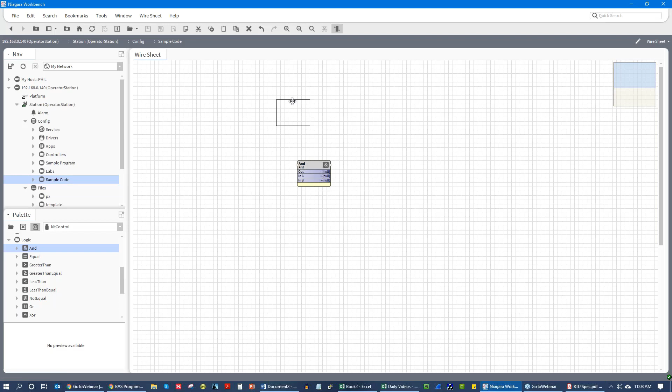All right, where I'm going to spend a good portion of our time though is under the blocks category. So when we think about blocks, with most manufacturers, you will have a set of common blocks that will stretch across everyone's software. And then you will have blocks specific to that manufacturer's software. So for example, let's talk about a common block, an AND block. An AND block is a simple Boolean input, Boolean output block.

So when we talk about programming, we're talking about three real data types that we're going to be dealing with: Booleans, integers or numerics, depending on what you want to call them. And those are basically floating points, analog points. Analog, meaning that it varies. Whereas Boolean is a true, false, 1, 0 state, analog is a variable state, so it's typically a number. And then enumerations, which are also known as multi-state values, also known as arrays, just depends on your programming software.

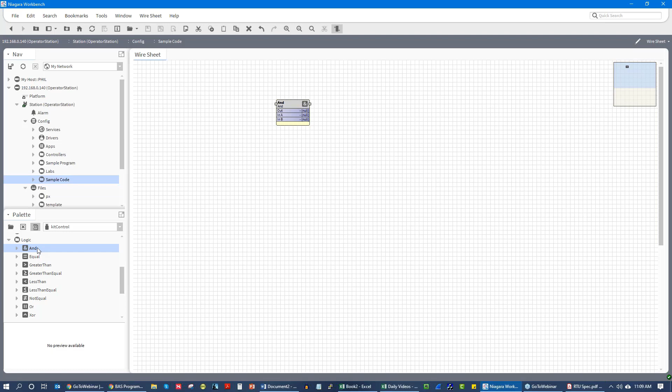And so when we look at blocks that are common, that you abso-freaking-lutely need to know, we look at our Boolean blocks. Our Boolean blocks are almost always going to be AND, OR, XOR, NOTs, things like that. These are blocks that we absolutely need to understand. Now, we don't have time in this webinar to go through truth tables.

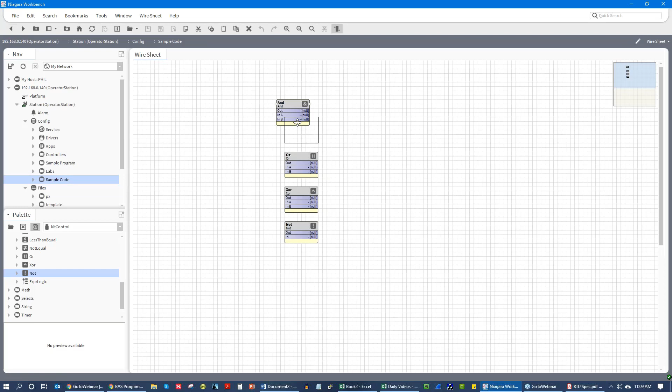Actually, let me click here. My mouse is being a little wonky and that is double clicking for some reason.

But we don't have time to go through truth tables. But a truth table basically is, if you have a certain condition of inputs, you will get a certain condition of outputs. So if you're taking notes, which I highly encourage you to do during this webinar, granted, you will get a recording, but I encourage you to take notes regardless.

What we're focusing on here, and you know what I did not do at the beginning? I did not go and check that you all can see my screen, but you guys are not saying that, hey, we can't see your screen. So I'm pretty sure you can see my screen.

All right. So as I said, Boolean blocks, we really want to know right off the bat. And as I mentioned, I'm not going to have time to go through truth tables, but we've got a blog article about BAS programming. I'll send it all to you after this webinar.

All right, so from there, we go into things like comparative logic, greater than, less than. Boolean is probably the most important logic blocks because you use them on almost every program, immediately followed by comparative blocks. So comparative blocks we're going to use substantially in a lot of our design patterns, some of the design patterns we'll talk through today. And so it's really important that we understand greater than, less than or equal to, not equal to, et cetera. And this double clicking is really obnoxious. All right. So with that being said, those are our basic logic blocks.

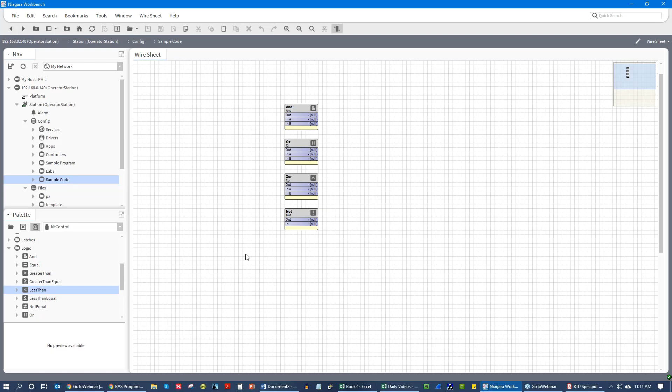Now, as we get into some of the more manufacturer-specific logic blocks, in our case with Niagara, we're looking at a library called kitControl. And we start to see they have things like lead lag cycles, which is basically for cycling chillers and air handler compressors, things like that, whatever you're trying to do on lead lag. Or dual fans, fan walls, etc.

Loop point is basically a PID loop, and T-stat is a poor man's PID loop that is basically supposed to emulate a temperature control driven PID loop, but I don't personally like it. I prefer loop point. So that is some of the manufacturer specific stuff. So you can start to see how when you get away from Boolean, you get away from comparative logic, and you move into loop logic, sequencing logic, you move into things like latches, you move into things like selects.

That is where you start to get more manufacturer specific. Now, this is where a lot of folks get screwed up. They are like, oh my gosh, I don't have the switch block, I have the select block or the latch block, or etc. Instead of having a flip-flop, I have a latch. And that hoses them and they get frozen, and it's not necessary.

So whenever you're dealing with this, and some manufacturers are better than others, I recommend that you, first off, if you're like, I can't figure out what logic block to use, I'm on a job site, I totally get what an AND block is, but I can't figure out these latches, I can't figure out these selects, et cetera, what do I do? That's where I highly recommend you utilize the manufacturer's information.

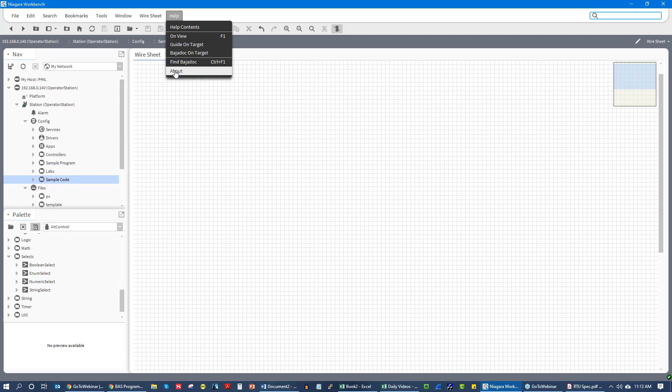Now, like I said, some manufacturers are better than others. So here I'll just show you. Let's say we don't understand what we're supposed to do with the Boolean select. So we would just type Boolean select in search, wait for the search to come up, and then we'll see, okay, Boolean select is found in the select folders. See selects for overview, and then we can start going through select. It allows one of multiple inputs to be selected and passed through to the output.

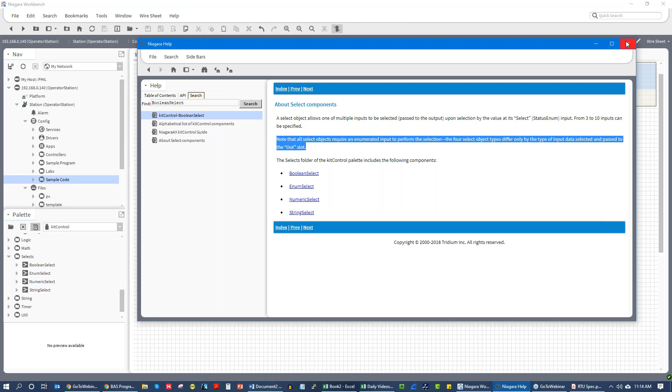So as we start to read select, we start to realize this is actually more like a mux block than anything else, especially with enum selects. So we start to figure out, oh, okay, this is what this block is able to do, and then we're able to fit it into design patterns, which I'll talk about in just a second. But before I go there, I want to talk about real-time versus compiled programming.

So Wiresheet is real-time programming. And this is what's neat about them pushing Niagara to edge controllers. You're also seeing other manufacturers start to push their frameworks using a single programming tool to their edge controllers. Edge controllers is really a marketing way of saying controllers that are in the field: air handler controllers, VAV controllers, fan coil controllers, etc. And most of us, when we talk about controllers, are actually dealing with free programmables. Very few of us are dealing with ASCs, application-specific controllers, anymore.

So when we're talking about a real-time programming environment, I don't have an actual edge controller mapped in. If I did, it would be here under our Niagara network. So with an edge controller that has Niagara framework, or anybody's framework, pushed down, and having real-time programming capabilities, as you added things to the Wiresheet, they are automatically in the controller.

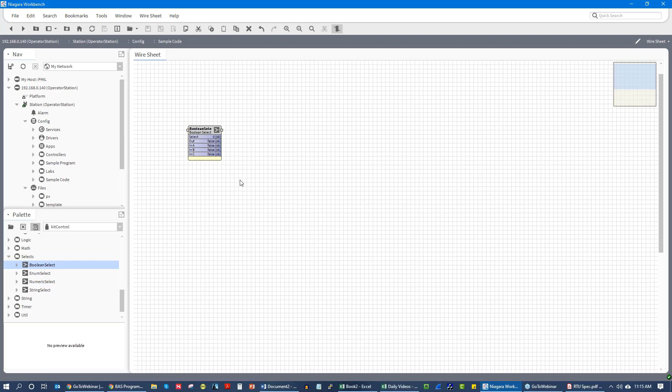Now that's different versus compiled programming, where you either have to compile and then download the programming to the controller, or you just have to download the programming, and the controller has to reset or potentially just update, and then the programming takes effect. So that is the big difference between real-time versus compiled programming. I'm giving you all a lot of foundation here that may be basic to you, because I want you to have that foundation as we move into the design patterns and the programming.

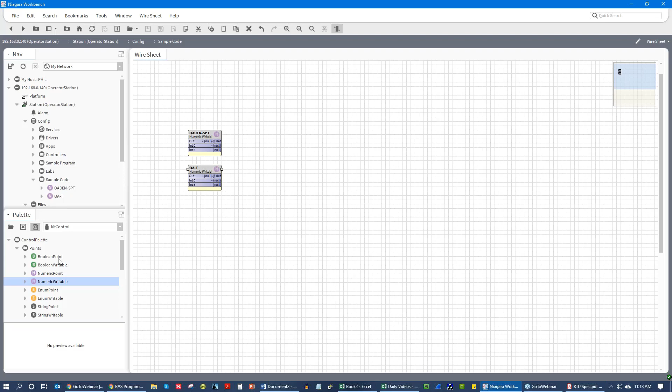Now, granted, I know that these are both logical points because I'm not using a program or a controller with actual physical points on it, but just play along with me. Pretend this is a physical outdoor air temp and this is a logical point. We're gonna have to play pretend just a little bit. All right, so we have that, and then we are driving an economizer enable command, right?

Econ enable command, okay? Now what's going on here is that we also, under our logic. So we will say, okay, and here's how I like to do this, is just read through. This doesn't work on every manufacturer's comparative blocks, but on some it does. So in this case, I like to say, if outdoor air enable set point is greater or less than, just depending on the sequence, usually it's going to be less than.

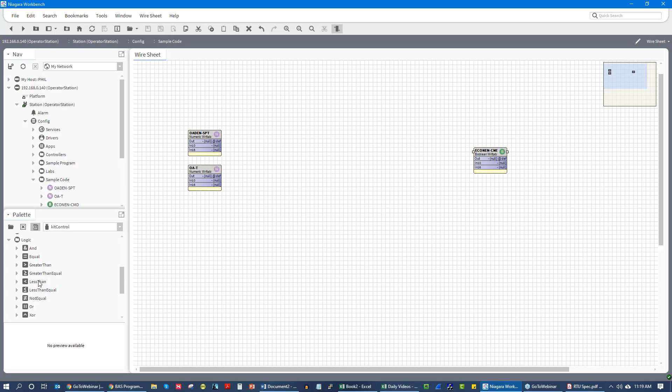So if the outdoor air temp is less than our outdoor air enable set point, gosh darn, this double clicking is obnoxious, then we will enable our economizer. Now you'll notice we have input 10, input 16. That's just a priority array that's built into these objects. So let me just command this to be, let's say that this is 55 degrees. And let's say that our set point here is going to be 60 degrees. Okay, so we see it's true.

Now here's the thing. Okay, that works for our economizer enable. But what that also works for is for a preheat enable. As we'll see in this rooftop sequence, we're going to have to enable our heating mode. We're going to have to enable our cooling mode. We're going to have to enable our preheat mode. We're going to have to enable economizer. This single design pattern will be utilized there in rooftop programming. This will be utilized to enable chillers. This will be utilized to enable unit ventilators within a warehouse.

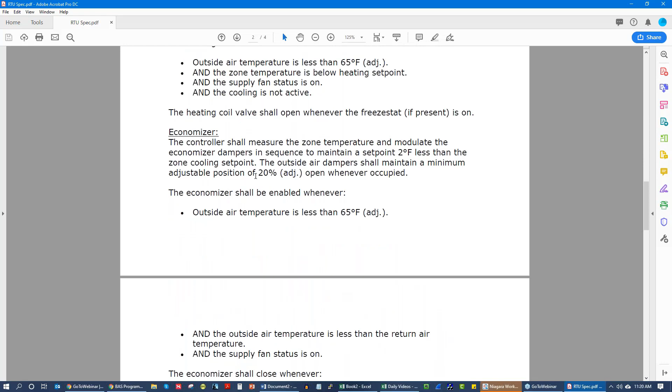So as you start to learn design patterns, you're then able to see sequences and you're able to read a sequence. Like I'll open up our sequence right here and we'll go to economizer and let's look at economizer enable. So economizer enable: outside air temp is less than 65 degrees. And we see a couple more variables, but as you see these other variables you can simply go and copy this design pattern, so in this one less than, you would copy these less than. So let's do that, right?

Let's look at this. Outdoor air is less than 65. So let's actually command our enable set point. Let me unclick that, enable 65, okay. Let's look at our other scenario. Outdoor air temp is less than return air temp, so we'll have to add a physical point called return air temp. We'll call it RAT. In this case, we'll say that return air temp is, let's just set it to 72.

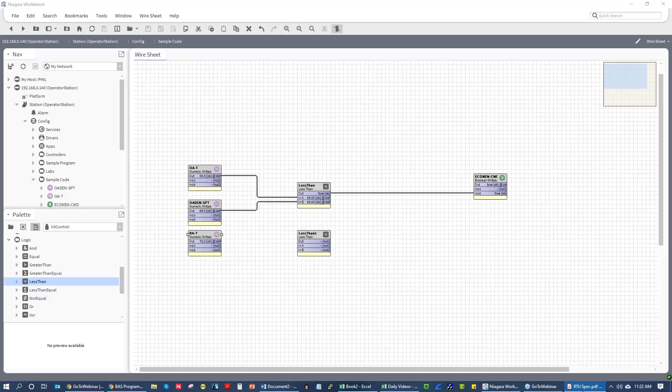Let's copy our less than, okay. Grab this bad boy, and if you want, you can label these less thans. So what we're saying here is return air temp, right? Let's look at this. Outside air temp is less than return air temp, okay. So we've got outdoor air temp is less than return air temp. Okay, you're starting to see how we're piecing this together. Let me control delete that line right there.

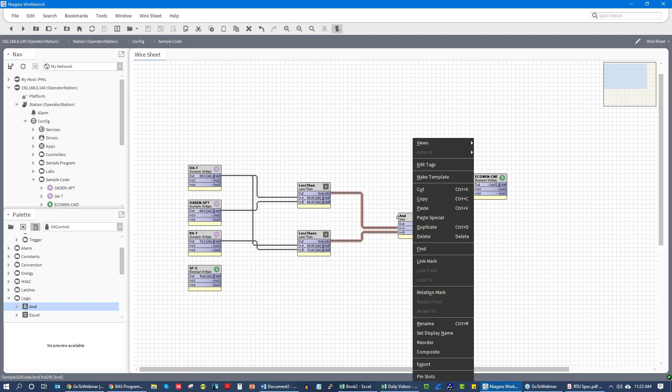And the supply fan status is on. So let's go and grab another point. Let's call this a Boolean writable, not a numeric writable, and SF_S. So there we go. And we'll go here and grab our logic AND block. Okay, true, true. Set this bad boy to true, just that way this will work. And let's pin some slots. Let's pin a third input here.

And let's send it there. So you see, we use the exact same pattern, and that is how we go in and program our Economizer Enable. And naturally, we're going to have the Economizer shall close, and so we could code that as well. But you see how the pattern applies, and we're able to use it.

And if I wanted to do a unit ventilator, I could do that. So I don't think I need to beat this horse anymore. I think this makes sense to you. So any questions on that? Feel free to go and type them into the question box. I'd love to answer them.

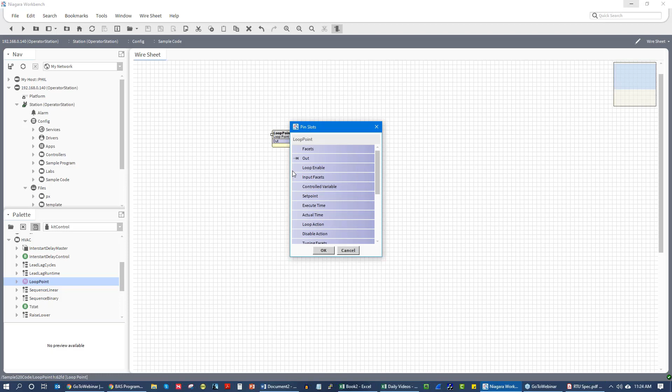Let's look at another pattern while we're talking about it. A common pattern that we see in VAV boxes, in Economizer Reset, is the PID into PID pattern, okay? So PID, proportional integral derivative loop, although we really in BAS should not be using derivative, is a loop type that allows us to take a controlled variable or process variable, basically an input, and then drive that to achieve a set point.

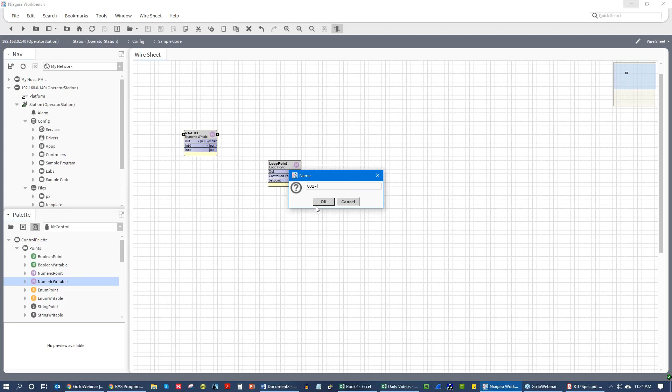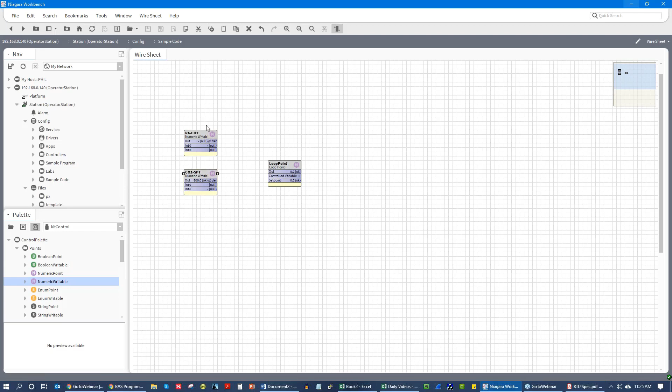So what we're going to do here with this pattern is we are going to look, in our case, at CO2. And so let's go and add a couple points, because we're going to be resetting our damper actuator based on CO2. So let's say return air CO2. Okay, and then we'll say our CO2 set point. And we'll set our set point to, let's just say 800 parts per million. Okay, and so what we can do here is we can have our CO2 come in, right? So what did I want to set this to? Let's set this to 1,000.

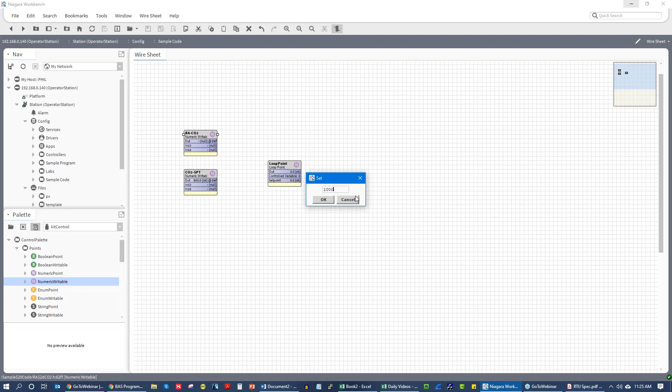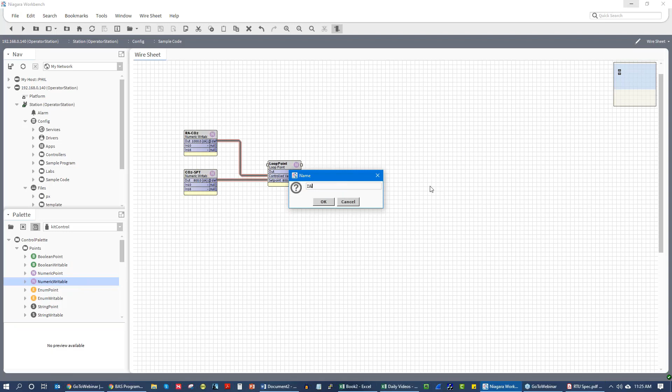Okay, so we'll output here, and I'm not going to set up this PID loop, by the way, just so you know. That is going to come into controlled variable. Set point's going to go into set point, and we're going to make sure our loop is enabled. It's not going to do anything because I don't have the proportional band or the integral band set up. But what's going to happen is this is going to come out to damper command, and it's going to drive our damper command. Now that's all well and good. That's a basic PID loop pattern, right?

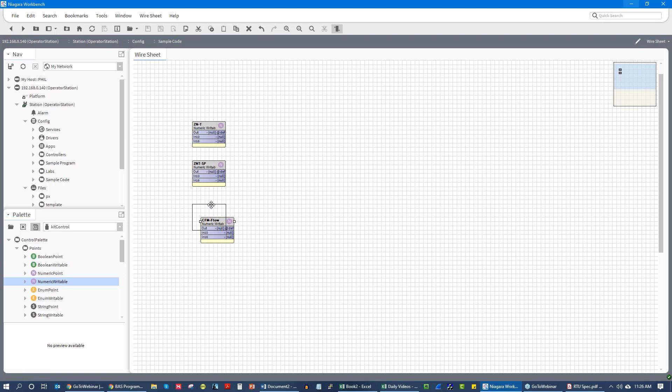Very, very basic. Now let's say that we needed to do something where we took zone temp, ZN-T, and we wanted to drive our damper actuator based on a min and max cooling CFM for a VAV box. So once again, I'll grab right here our CFM flow. And we will grab two PID loops. So we'll grab here loop point, and I'll call this one ZNT PID. And then this loop point will be CFM PID. Okay, so we'll pin slots, controlled, and we'll pin slots here as well.

Boom, boom. And what I'm going to do here is I'm going to say, okay, let's set my zone temp to 78. And then we're going to set my zone set point to 72. Okay, so we go here, controlled variable. All right, 78, 72, my PID loop. And we'll just set this up real quick.

Okay, so my proportional constant, let me do the math in my head real quick. 100 is going to be the output, and our range is typically 10 degrees. So we'll put a p-band of 10, and we'll put an integral of 5. Like I said, I'm not going to go into why I'm using these numbers here. We have videos on PID loops and things like that. Okay, so we've got our zone temp PID.

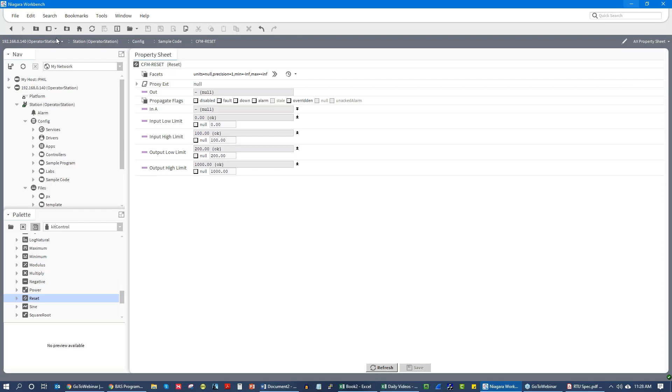Okay, and then our CFM low, let's say, is going to be 200, and our CFM high is going to be 1,000. Okay, so we've got all this going, and I'll back up, and I will grab my output, put it into my input, and now I have a CFM calculated cooling set point.

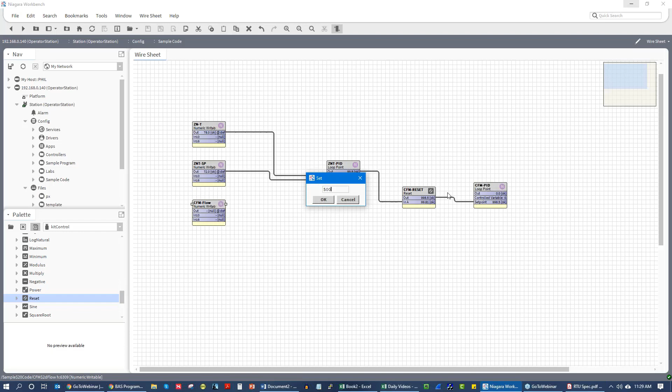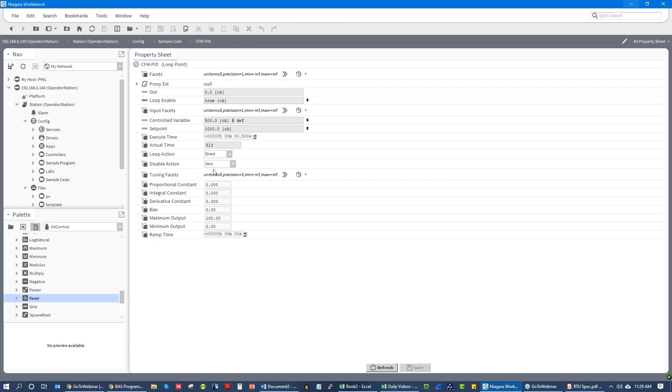That's going to go into my set point, and then my CFM flow, we'll just set CFM flow at like 500. And we'll send this over into our controlled variable. Go here. All right, so I want this to be reverse acting. And I want this 100 divided by 1,000, so it should be 0.1, and integral constant of 5, if I did my math right.

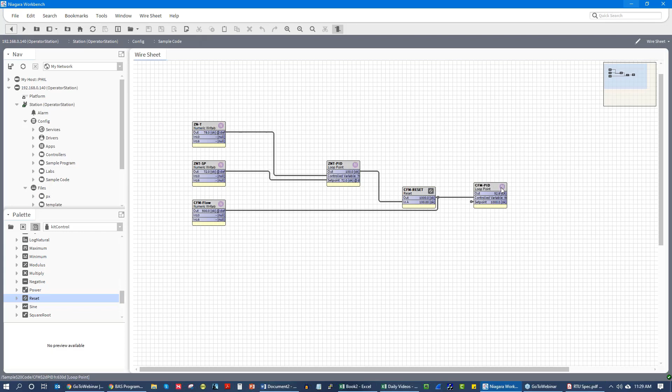And so what's going on here is that I'm going to take zone temp, you all seeing this? And zone temp set point. And I am saying, hey, I'm not reaching zone temp set point. I'm not dropping my zone temp below set point. So I'm sitting here, right? And because I am above, and it's a direct acting loop.

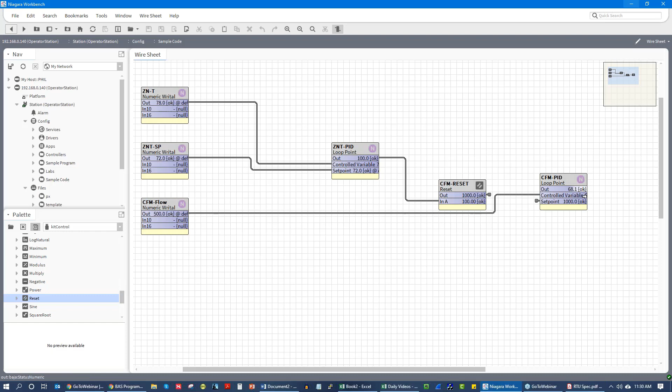And then I've got my CFM flow, my actual CFM flow in the VAV reading. And I've got my calculated CFM between min and max cooling CFM. And it's coming into my CFM PID, which then would go to my damper output. So I would just go here, and this would be DMPR-O, damper output. And there we have it.

So that is how design patterns work, because now I have this pattern, and I can use this exact same pattern for heating CFM reset. I can use this pattern for calculating CO2, all sorts of stuff. So that's how we look at patterns, and then we start to understand what they're trying to achieve. And then when we look at our spec, we're able to say, okay, I know these patterns. I'm able to apply these patterns.

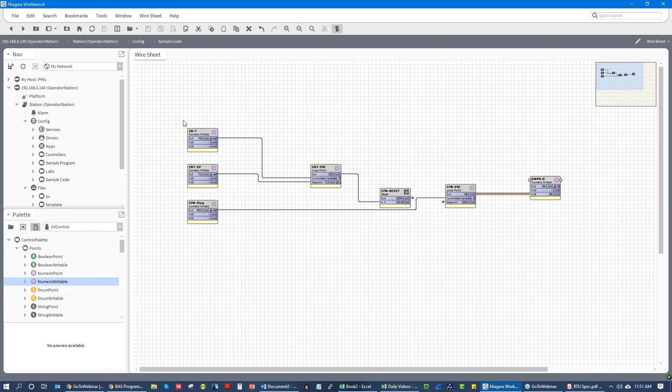And also, if we don't know someone else's programming language, we're able to look at that programming language and identify patterns and figure out what they're doing within that program.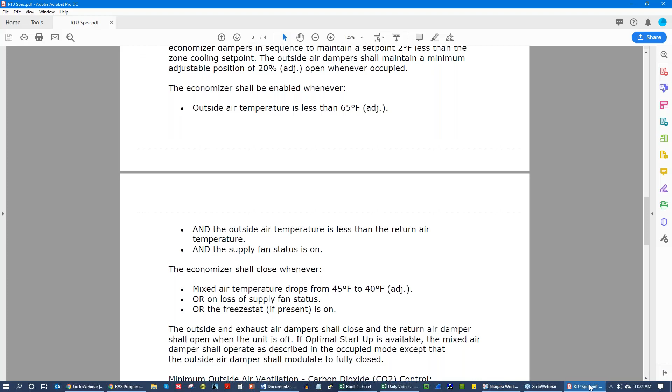All right. So now, let's see how much we can do in 15 minutes, and that will leave like 10 minutes for questions. So we're going to go through and program parts of this. Depending on your manufacturer's software, you may have to program alarms.

You may not have to program alarms. Some folks like to hard code their alarms in the actual programs. Some folks prefer to just have the points trigger alarms. It really just depends both on the specification as well as your personal preference. So we're not going to be coding any alarm conditions just due to time, but we will look at, okay, we've got this system, how do we go through?

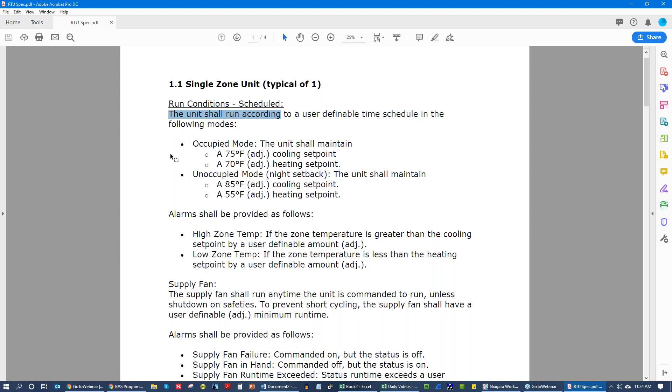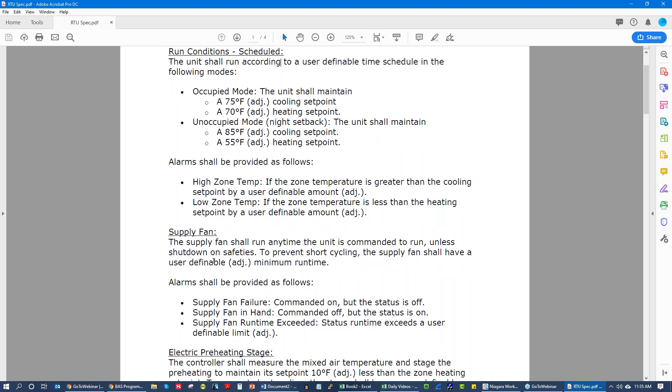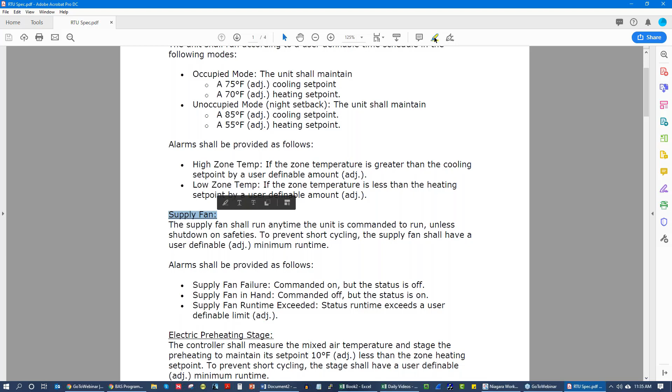So the first thing we have to do is identify our physical points and our logical points. What I like to do is just give a read through the sequence of operations. Okay, supply fan shall run, unit's commanded to run. Supply fan shall have these things. So we've got a supply fan. I'll highlight that. That's obviously going to give us fan status. Why is this highlight? There we go. It's going to give us fan status and fan command. Okay, so we move along.

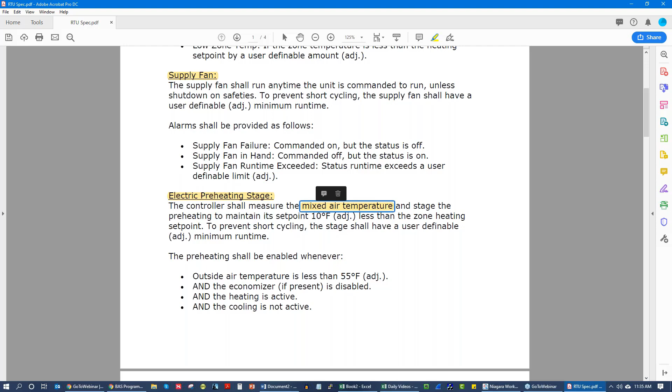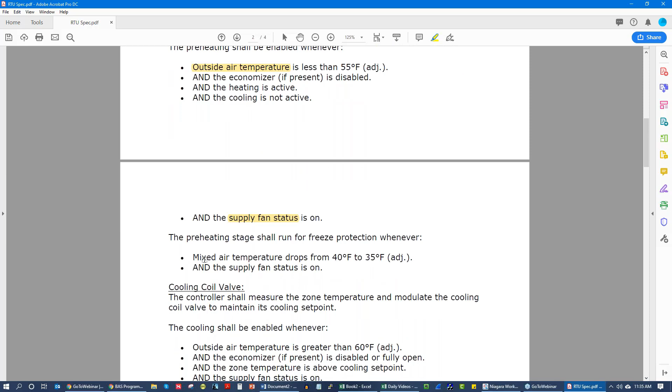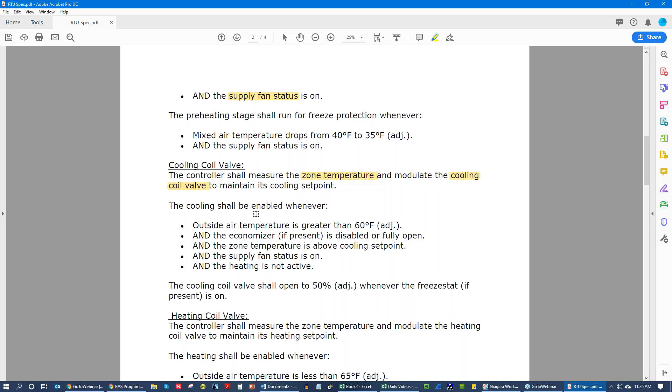Electric preheating stage. So we have a single stage of electric preheat. That's a point right there, right? Preheat command. We also have mixed air temp. We got outdoor air, and we just continue to go through this. Supply fan status, preheating stage, freeze protection, mixed air, supply fan status, cooling valve, zone temperature. You all are getting the point, right? I don't literally need to go through every point in here, do I? I don't think so. So we're able to figure out all of the points that we need, our physical points and our logical points.

And what I would normally do, but because we're working with a PDF, we're just going to go with it as we have it, is I would actually move the sequence chunks around. I would break these out into chunks and move them around. I would say, okay, this is run conditions. Obviously, everything's dependent on the system turning on, so that would probably go towards the front. Supply fan also would go towards the front.

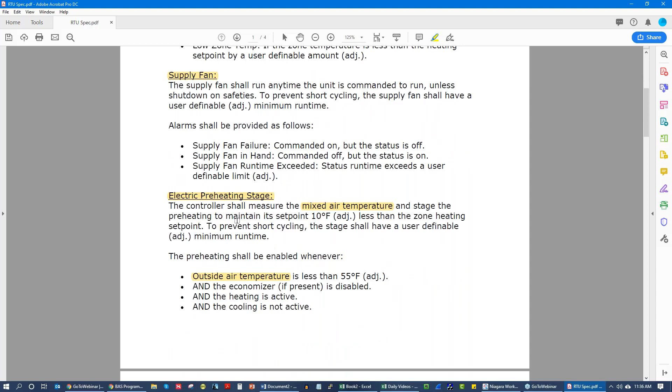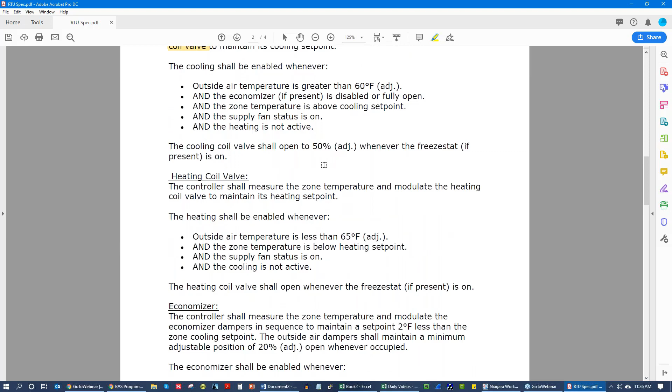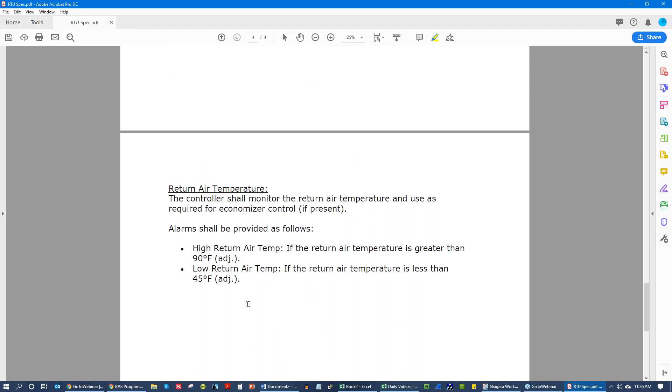Preheating, I would probably move towards the back. I would probably move cooling up towards the front, followed by heating valves. And I'd probably put economizer in front of both of those, just because it's a free cooling mode. Mixed air, CO2, those would all come afterwards. Return air, that's just saying we got some alarms. So all in all, not too bad of a thing to program.

So first thing we need to do is we're enabling this based on a time schedule. I could go to the kit and add a schedule and do all that fun stuff, but just for the sake of time, we're just going to call this occ schedule. If I can type, because typing is apparently a challenge today. And just for giggles, we'll set this to true. So looking at our schedule, we have an occupied and an unoccupied command with cooling set points. So let's go through and start adding our points.

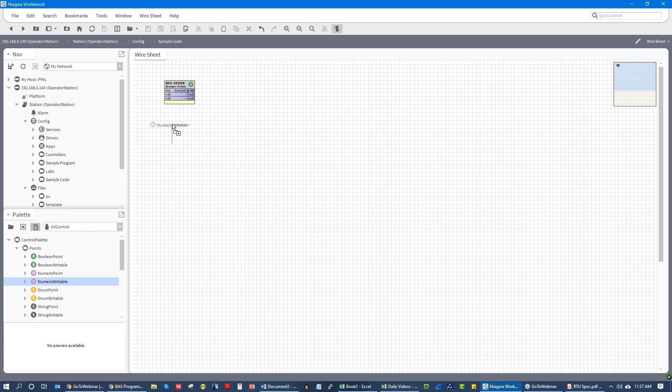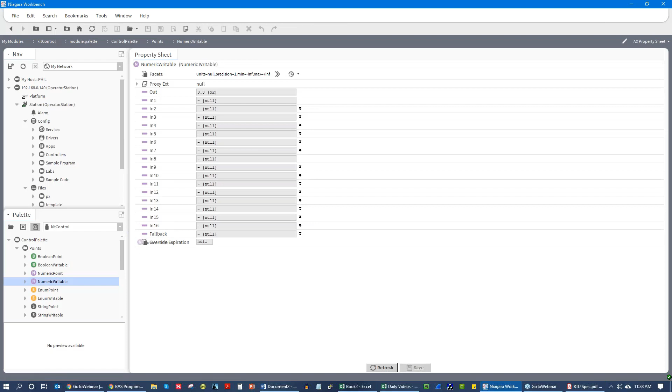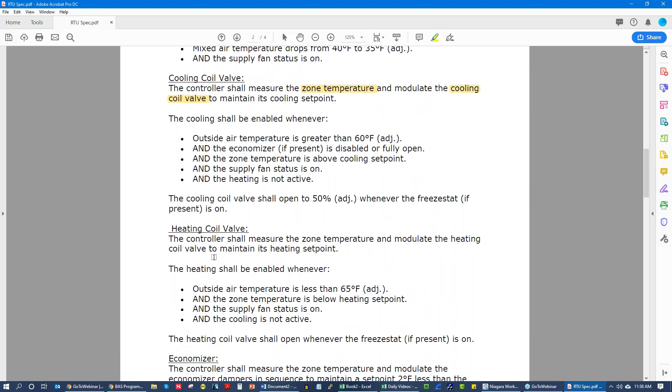So we're going to have a zn-t, zone temp. We are going to have a sf-s, supply fan status. We are going to have a mixed air temp. Let's see what else we can find in here. Oops, let's go back. We have supply fan status. We have cooling valve status, outdoor air temp. We got a return air temp. We got a mixed air temp. We got a CO2. So mixed air temp, supply fan, return air temp.

We'll add that. Gosh darn thing. I'm going to replace my mouse after this webinar. This is really frustrating. All right, here we go.

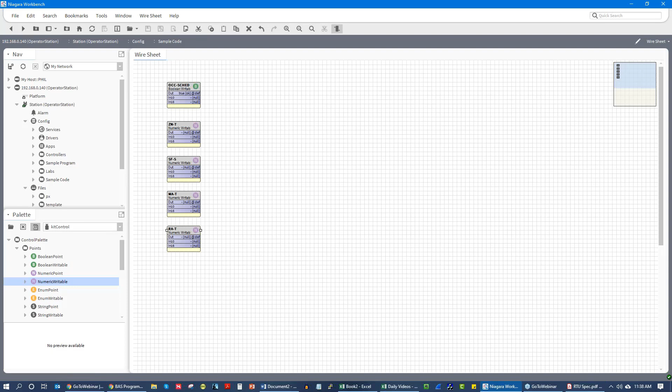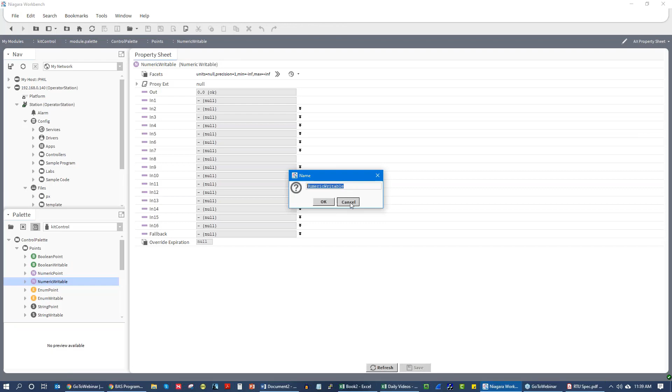So we'll continue. Schedule, zone temp, supply fan status, mixed air temp, return air temp. I know schedule is a logical point, but that's all good. Zone temp, supply fan, there, OAT. And I'm sure I missed something on here, but we'll get it when I come back. Why are you doing this? All right, so we'll add that right here. Here we go, supply fan command.

We'll add, actually, that should be a Boolean. So we'll just change this real quick. Cooling, oh. Like I said, we're doing this on the fly. We'll do a Boolean writable, supply fan command. We'll do a numeric writable, and we'll call this heating output. And we will do a Boolean writable for preheat command.

Because remember, it's electric, so unless it specifies that it's like SCR, it is going to be a Boolean command. It's going to be an on-off command, like with a RIB relay or an IDEC driving it. Okay, so we've got supply fan command, cooling, heating, preheat, and we are going to have our economizer.

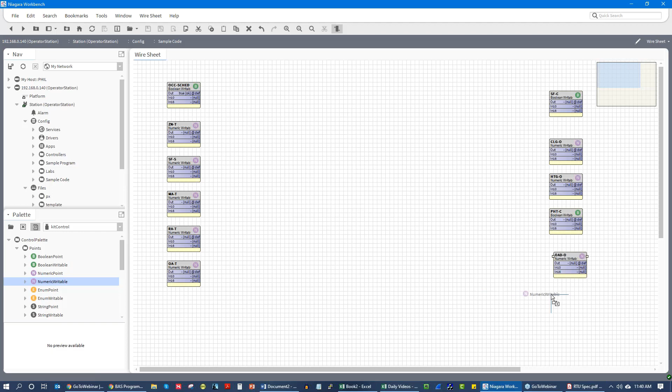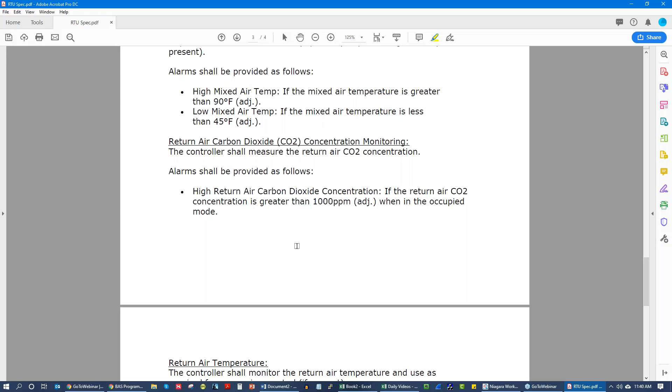So OAD-O, and we're going to have our opposing RAD-O, right? So outdoor air damper and right there, return air damper, and like I said, I knew I would remember something that I missed. We're going to have return air CO2. And I believe that is all we have for our physical points. CO2, mixed air temp. I don't think we have a low temp sensor. Oh, there we go, freeze stat. So we do have a low temp alarm.

And that will be, my goodness, talk about being frustrated. That's a lesson for all of you. It is always the low-priced peripheral device that causes the problems. It's the bad sensor, it's the bad relay, or in my case, it's the bad mouse that needs to desperately be replaced.

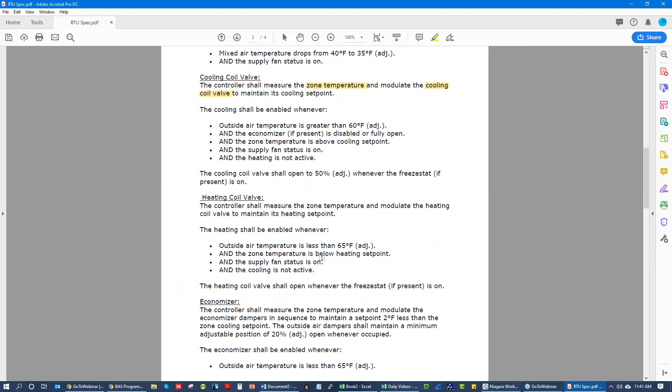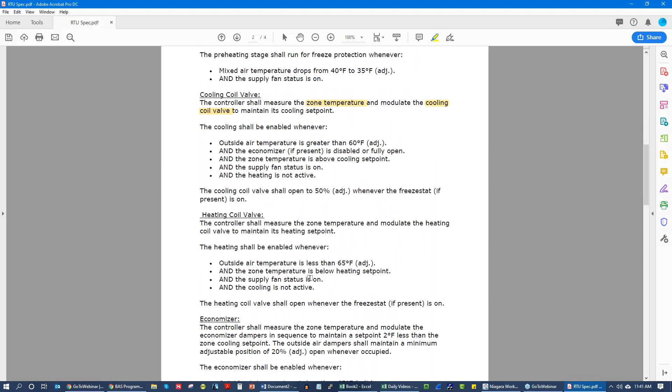All right, so we've got all of our physical points here. Now we need to add some set points. Okay, so we are going to have a couple different points, right? Let's take a look at what we're working with. So we have our outdoor air enable set point. We have our zone temp set points. We're going to have our CO2 set point. Okay, so we're going to have a couple set points, and I'm sure we will add more as time goes on. So CO2 set point. Okay, we'll just kind of drag this guy down here.

And what I'm going to do, just for the sake of time and your own personal sanity, is I'm not going to add every single set point and eat up all our time. I'm going to just go through some Boolean logic, and I'm going to add the set points for those. But realize in a program, you would typically not do that. You would take your time, you would add all of your set points, or as many as you can reasonably infer, and then you would do your Boolean logic, and then your analog logic. But because we have 18 minutes left in the webinar, I am going to just do that.

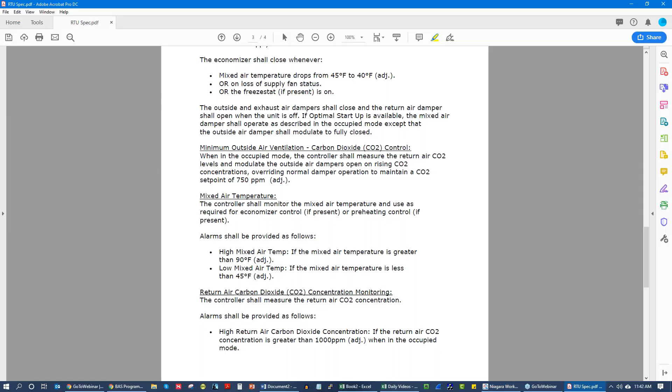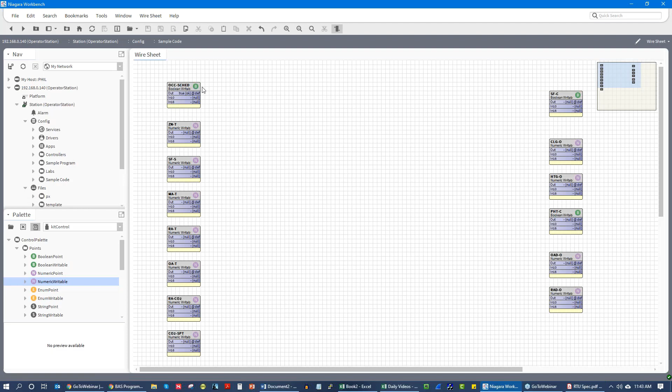Okay, so let's start with fan command. We need this for pretty much everything. Supply fan shall run anytime it's commanded to run unless shut down with safeties. Okay, so we have a couple alarms and we have runtime exceeded. I am not going to program these just for the sake of time. So our supply fan is going to simply be driven by our occupancy schedule.

Okay, pretty straightforward. Now, just so you know though, if we were driving on those conditions, we would use an AND block and we would say that all of those conditions are false, or we could use NOTs and say all those conditions after notting them are true in order for our supply fan command to enable. Just depends on your own personal preference, how you like to read the programs.

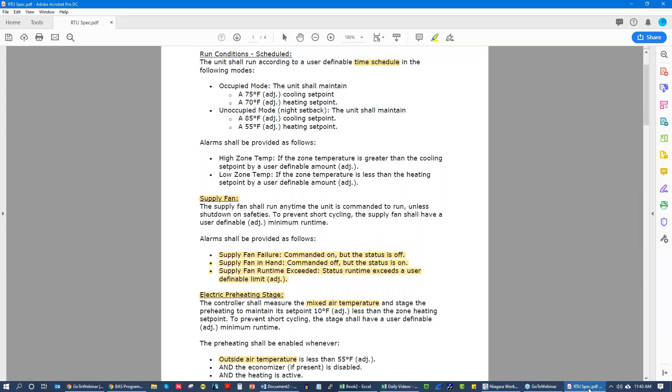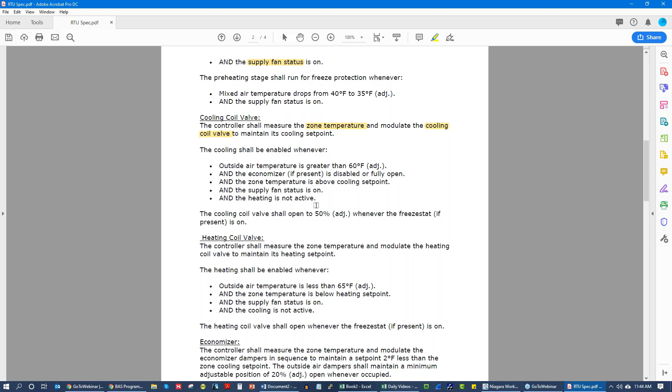All right, so with that being said, let's look at right here. Okay, we've got a cooling set point and a heating set point. Let's look at cooling mode. I know I said we would do economizer mode first, but let's just look at cooling mode. Okay, so cooling controller shall modulate to zone temp. So we're going to have an unoccupied and an occupied set point, and we're going to modulate to control those. Those occupied and unoccupied set points are 75 and 85.

Alrighty, so we're going to need to have a select, and this is where I have to remember, Boolean select is driven off of, no, I don't want select. I actually want switch. And let me remember here if I'm going to use a Boolean switch or, yeah, I'm going to use a numeric switch. That's right.

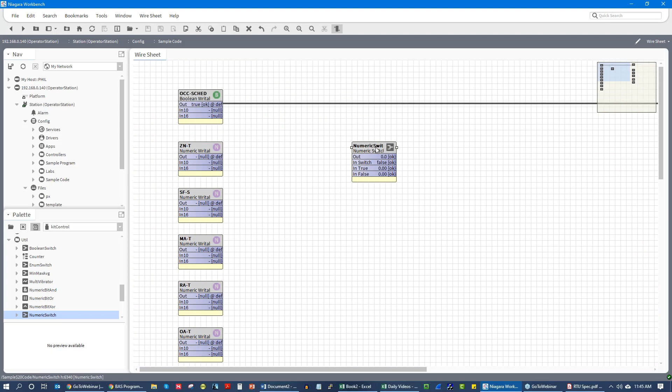So there we go. Okay. So what I'm going to do with my numeric switch here, and I'm going to label this as, let me go back here, rename. I'm going to label this cooling set point switch. Okay, and so my schedule is going to go here, and it's going to go into the switch input, right? And we see that it's true, and so when it's true, I want to have my cooling set point.

Now, some folks will just straight up hard code this into the switch. The problem with doing that is, as we read the spec, it's got to be adjustable. And whenever you see adjustable, that usually 9 times out of 10 means from the UI, from the front end. And so because of that, because it has to be adjustable, we're going to have an occupied cooling set point. I'm just going to copy that.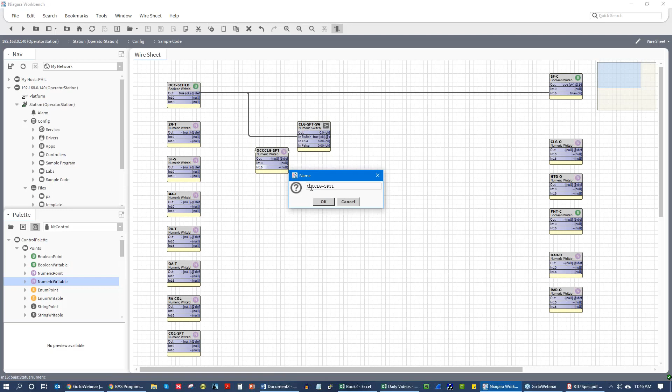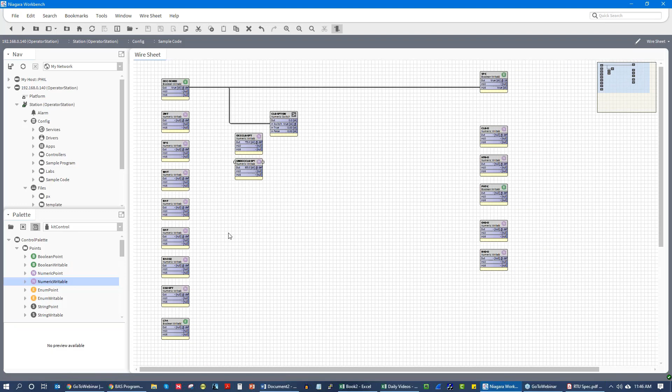And let's copy paste. We're going to call this unoccupied cooling set point. And so those were, if I remember correctly, 75, 85. So let's set this. And we'll set this bad boy to 85. Okay, and we'll grab these logic blocks right here, drag them down a little bit to make some room.

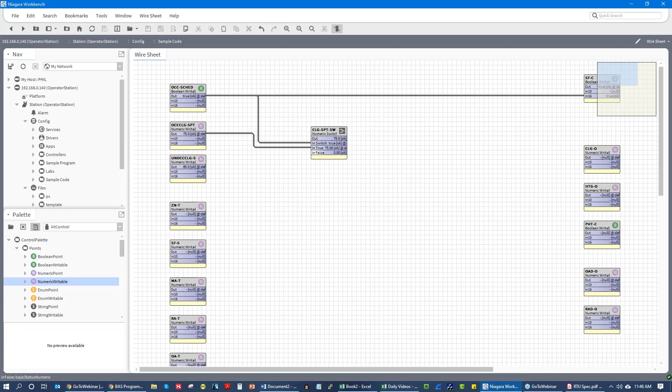I personally don't like, if I can, putting my variables in the logic flow. I like to keep them all kind of stacked and organized. It's a little OCD thing, but you know, it works for me. So we'll go here, and this will go into true, this will go into false, and now we have 75 degrees as our set point, okay?

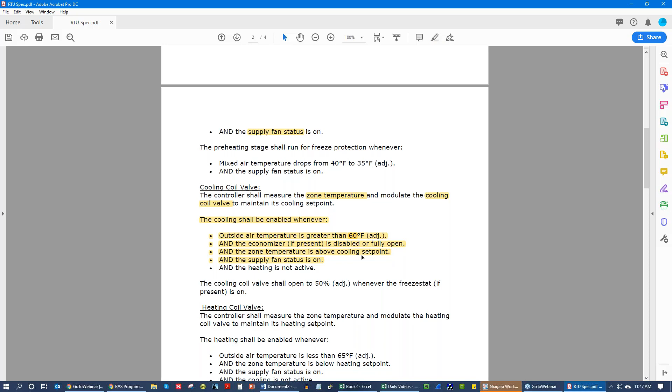So we've got our set point calculation, and we have to look at what is going to enable our cooling valve. So that will be our Boolean, okay? So our Boolean is going to be our enable points right here. Cooling valve shall be enabled whenever outdoor air temp is greater than 60, economizer is disabled or fully open, the zone temperature is above cooling set point, the supply fan status is on, and the heating is not active.

Now, obviously we have some logic here that we have not written, so we'll have to use a placeholder until we write it, and that logic is right here. Heating is not active, and right here, economizer is disabled. So since we haven't written economizer control and we haven't written heating control yet, we are going to leave those as placeholders and come back to them. But outdoor air is greater than 60, okay?

So, oops, close that. Here we go. So let's go to OAT cooling enable set point, okay? And let's go to our comparators, which should be under logic. And what did it say again? It said OAT is greater than 60. Okay. So actions set 60. And we are going to say our OAT coming in here is greater than 60. And once again, we're going to have to drag this stuff down a little bit.

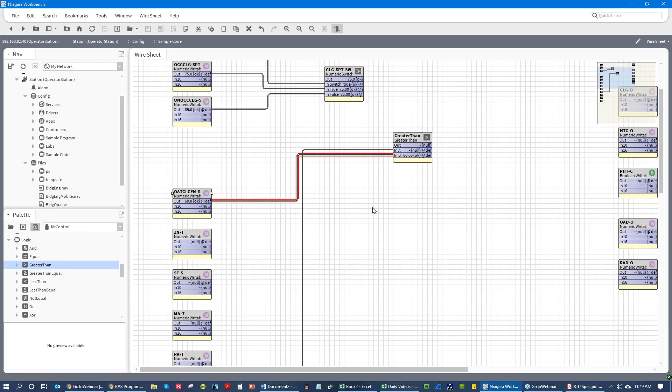And what I'm not getting into here, folks, is that you can nest programming inside folders to make this even cleaner. I would not have everything on a single screen. I actually would have folders, and then I would link out of those folders. So I would have a cooling only folder, I would have a heating folder, and those would be under my program, and I would put my logic in there to make it cleaner, but we're just doing it dirty here.

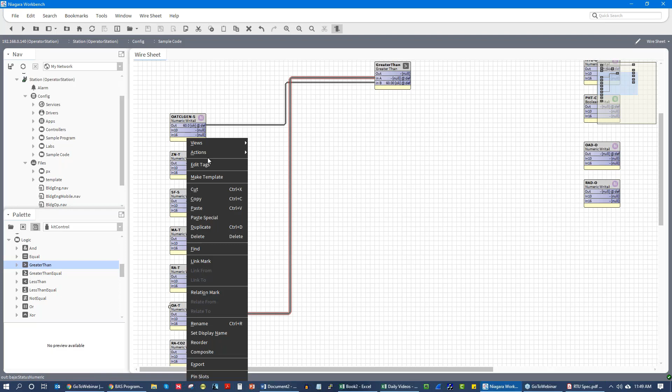So realize that in production code, in actual commercial code that you would be taking to your customers, you would want to make it a little bit cleaner, okay? And I realize that we are starting to rapidly approach our time limit. Okay, so we see we've got our first thing done. And usually what I will do is have this printed out and put a check mark next to it when I've done it. And I will work my way down.

And what I like to do, and this is a really cool tip that I encourage you all to follow, is when you are programming according to an SOO, according to a sequence, and you have an AND block scenario, which this obviously is, and by the way, most sequences of operations are not going to be this clear for you, but when you have an obvious AND scenario, program according to the AND block.

So your first thing into your AND block, okay? So first thing into the AND block should be this right here, because now as I'm reading the sequence after the fact, outside air temperature is greater than 60 degrees. Oh, look, there it is, the first input to my AND block. Now we say economizer is present. We don't have that yet, so we're going to skip that, right? And we're going to just pin our slots.

Okay, and we're going to say, and the zone temperature is above cooling set point. Okay, so we've got our outdoor air temp, and we've got our set point right here. And we're going to grab, and you're seeing how this greater than comparator design pattern is being used, right? So I'm going to grab this, copy and paste it. And in this case, if I really wanted to, I could say ZNT greater than zone set point.

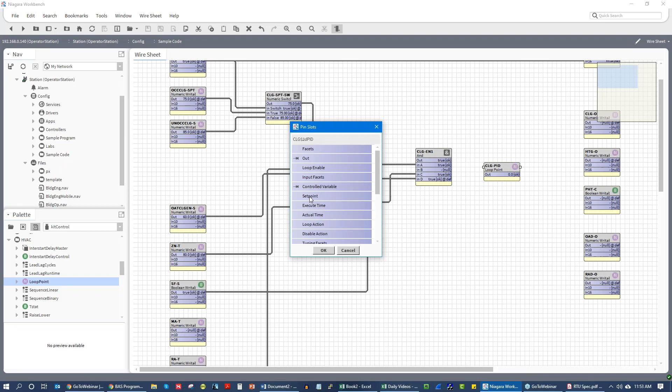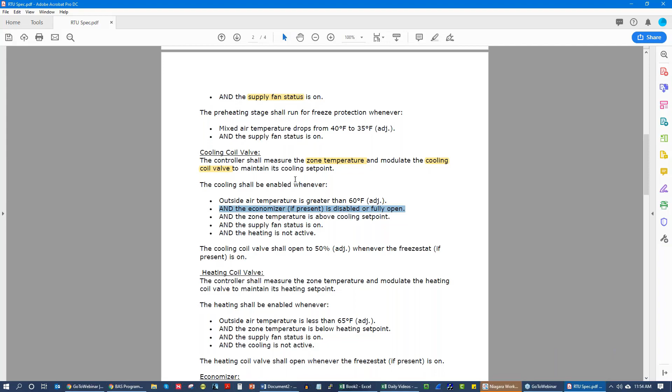So we go here, pin slots, control variables, set point, loop enable. Okay. And we would output this. Gosh darn it. Output this to loop enable. And now our loop's enabled. And then our cooling PID. Cooling valve is going to measure zone temp and modulate it to effectively control to the cooling set point. So we have our cooling set point right here coming into there, and we have our zone temp going into our controlled variable. And then we would set up our PID loop.

We would set up the actual P band and I band and direct acting versus reverse acting. And then we would go and set that right into our cooling output and drive our cooling output. So there you have it. That is how, and I realize we are 5 minutes over my target time of 11:50 to finish this, but that's how I read through the sequence and I write that snippet.

Now, as I mentioned, right, I would put this in a folder. I'd have cooling control. And I would put all this code in there. And then as I did that, I would link, sorry, not pin, I would link to specific things within that logic. And I would then have it all sitting in there. So it's not this garbled mess. But with the time we have, we didn't get to that.